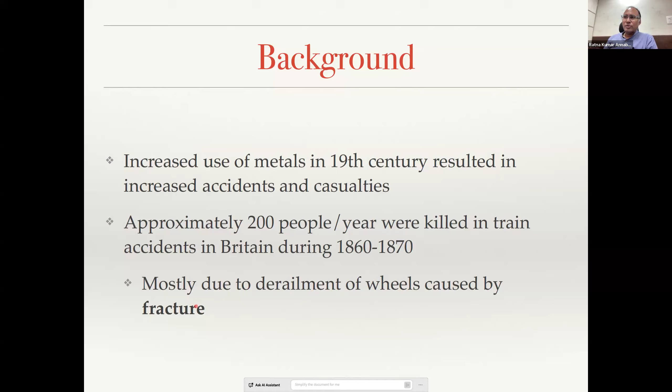Most of these accidents happened due to derailment of wheels, primarily caused by fracture. That means the wheel would have broken, for example, and that led to the failure or the accident.

If you look at news items on fracture failures in Britain: on 19th March 1830, at the Montrose Suspension Bridge, which is a suspension bridge having suspension wires, essentially steel metal cables, at one point of time there were 700 people standing on the bridge to watch boat rides, which were quite popular in Britain. The suspension bridge collapsed - one of the wires gave away, and then the bridge collapsed.

In 1887, a very disastrous year for railways in the UK, within a span of 3-4 months there were several accidents. On 20th April 1887, they saw the most serious train accident, which happened because of the breakage of the drawbar. There are other similar accidents, most of them associated with fracture failure of the components.

Another popular failure was observed in these Liberty ship accidents. During the Second World War, the Liberty ships were used in the Atlantic Ocean to fight Nazi forces.

In Britain, they were making these ships, but they didn't have enough capacity to make so many. So the USA said, okay, we will make them. Out of 2,500 Liberty ships made by the USA, there were at least 1,500 instances of brittle fracture. It's a huge number, and 3 of those ships literally broke into 2 pieces, like what you've seen in Titanic.

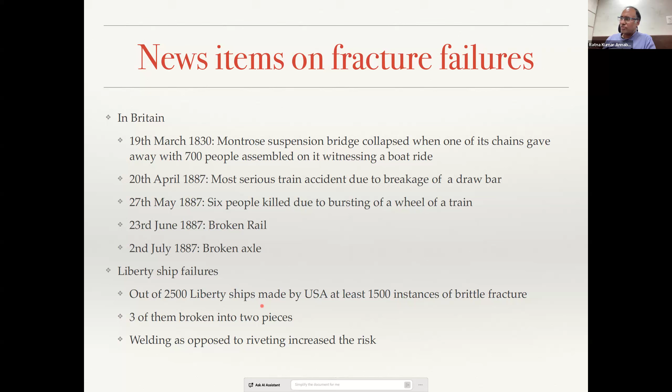So all these failures that happened are catastrophic failures primarily because of fracture, and all these involved the presence of cracks. For example, if you talk about commercial aircraft, you do a periodic inspection - every time the flight is taken, the moment it lands, there will be several inspections done.

These are called visual inspections. But from time to time, every 3 months or so, they will do a detailed non-destructive evaluation of the flights. Meaning, they will send ultrasonic waves and try to measure the length of a crack.

All these structures will have cracks in them. No matter what you do, you cannot produce a product without cracks. There will be cracks, but are these cracks of such a size that one needs to be worried about? That is what these periodic inspections will tell you. If they are not critical, they will let the flight fly. Otherwise, they will have to do some intervention.

Similarly, cracks or crack-like defects in ship structures, bridges, pressure vessels - everywhere you will have cracks. And hence also in nuclear reactors, cracks or crack-like defects are a serious concern. So one needs to keep in mind how to design components when there is a crack present in the material.

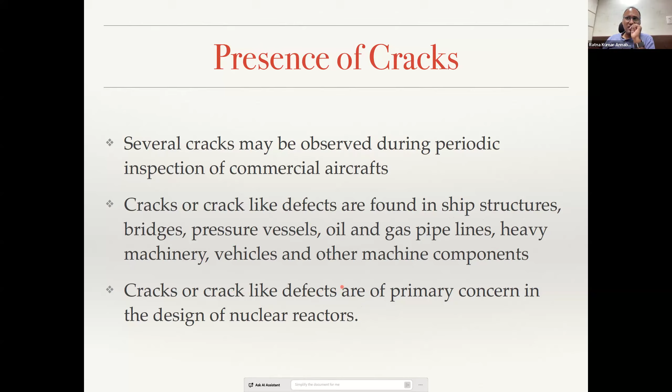So in the previous classes, we talked about the stress concentration factor. When there is a geometric constriction, you have stress concentration, because of which locally there will be very high stress generated, although far away your applied stress is less. That is designated by the theoretical stress concentration factor.

What does it indicate? It indicates the average load required for the onset of plastic deformation. That means if you apply 100 MPa, you may have a region where the stress concentration is 4, and hence locally the material is experiencing 400 MPa, which is much above the yield strength of the material. So one needs to be very careful about it.

This KT, the theoretical stress concentration factor, is limited to structures with known dimensions. As we saw in the last class, to compute KT you have to know the dimensions. Depending on the dimensions, the KT may change.

We know that if you take the case of an elliptic hole, when you make the minor axis dimension d tend to 0, then the KT tends to infinity. That means KT approaches infinity when there is a crack or flaw or inclusion where the root radius tends to 0. So if you have an elliptic crack or a slit in a material, the d is essentially 0.

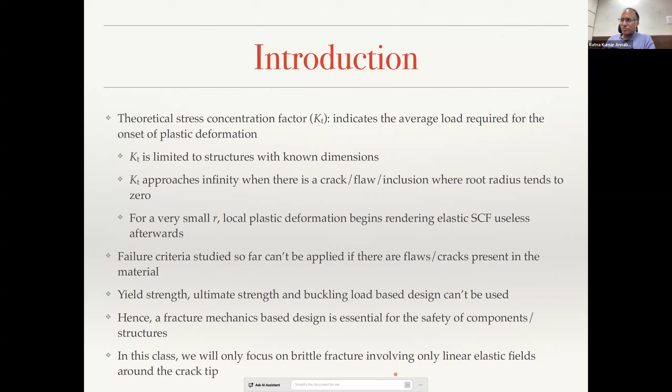So as I told you, if you look at an elliptic or ellipsoidal crack, and you are applying a far field stress, the stress concentration factor, the sigma at any position, depends on the far field stress S times 1 plus 2 root C by rho. The sigma we are talking about is at the crack tip, at this position.

Now rho is the radius of the crack tip. What is the radius of the crack tip? If you would plot the curvature of the crack tip, and plot the stress concentration factor, that is sigma by S on the y-axis, and x by rho, the position, on the x-axis, you ask: at a given position, what is the stress? Far away, it should be equal to sigma y.

But near the crack tip it is going to be 7 times the stress concentration factor, depending on the value of C by d being 3 — 2 times 3 is 6, and then 6 plus 1 is 7. So the stress concentration factor is 7. That means, although in the far field you have applied only 100 MPa, here you will see 700 MPa. And that could be much beyond the ultimate strength of the material, hence you need to be concerned.

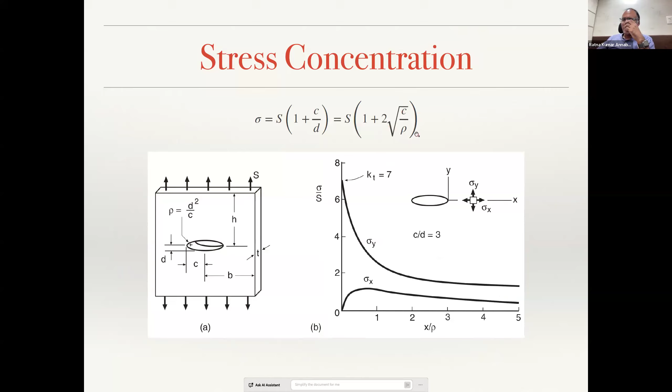Similarly, if you have a purely brittle material, you will have several micro cracks ahead of the crack tip, and those get activated when you apply the load. So there are different ways that stress concentration can develop, but unlike the theoretical stress concentration factor that we estimated to be infinite, in reality it will never be infinite because of these various constraints that we encounter in real materials.

Okay, now let us look at this particular scenario. On the left hand side in this figure, on the y-axis you are plotting crack size, on the x-axis as a function of time. Let us say you have a structure whose crack length is some number initially. As the structure is subjected to loading, as a function of time, the crack length is increasing.

So when the crack length is A0 here, then the structure will have some strength. That is what we call the design strength of the material, assuming that there is no crack. But as the crack increases its length, the material's ability to resist the load decreases. The residual strength decreases, right?

And let us say you have designed a component whose expected highest service load is this, and you have designed the component here. Until from here to here, failure will not occur because the expected highest service load is here. Once the crack length increases beyond, you will have further reduction in strength, and that is when the failure may occur.

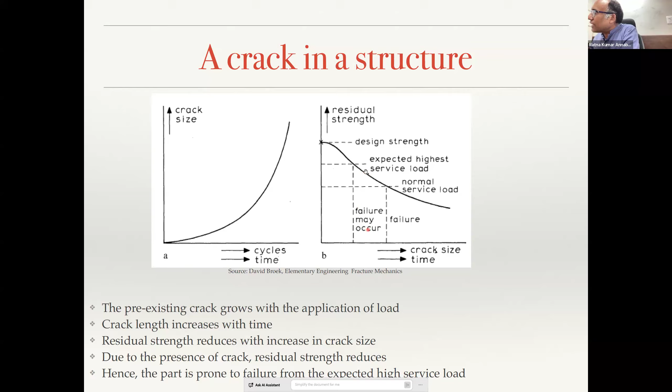Okay, now the second question is, let us say this is my service load, meaning this is the load that the component is going to be exposed to. Another question I can ask is, what is the maximum size of crack that I can tolerate? If my crack size is this, then at the service load the residual strength is this. If I am confident that my component is only going to operate at the service load, and I am not going to increase it, then depending upon the factor of safety, I can possibly allow this much crack size. So that is the question: can I know what that crack size is that I can allow?

And the third question is, now let us say I know what the critical crack size is. So I should ensure that I know my service load, and I should ensure that my crack size does not go beyond this value. Now, when I commissioned the component, I did the NDT and found that the maximum crack size is some number, much smaller than the critical crack size. Now, when will the structure fail? When this initial crack size, found to be much smaller, grows to the critical crack size. That is when the structure will give way. Now the question is, how long does it take for this initial small crack to grow to critical crack size? That's important information for us as engineers to decide whether we can keep the component in service.

And then, for example, if I have designed a component — say I have designed an automobile axle — and the service life of that automobile axle is 20 years, that is the maximum service life I have given; I have not given warranty beyond 20 years. Now the question is, what is the maximum size of crack that can be permitted when the structure starts its service life? Meaning, if I have to give a life of 20 years, at the beginning of service what is the maximum size of crack that I can have? If I have a crack larger than that, I cannot give 20 years of service time, because within 20 years it might reach critical crack size.

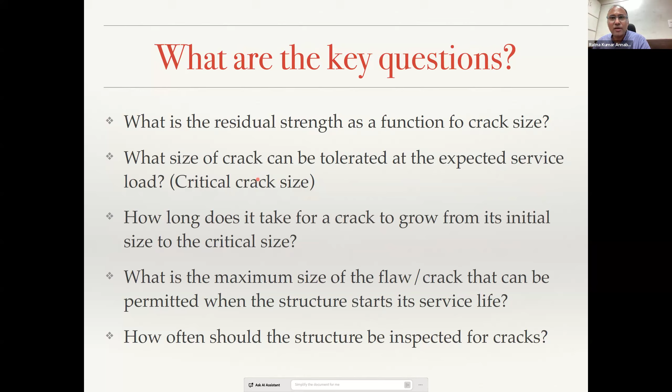So these are questions that we have, and in order to ensure safe working of a component that you are deploying, the answers to these questions are extremely important. So who will answer these questions? The answers to these questions, or some of them, can be given by fracture mechanics. So if you adopt a fracture mechanics approach, you can answer some of these questions. For the other questions which cannot be fully answered by fracture mechanics, fracture mechanics can still show a direction in which you can go to find the answer. And that is the reason why we need to study fracture mechanics. Any questions until now?

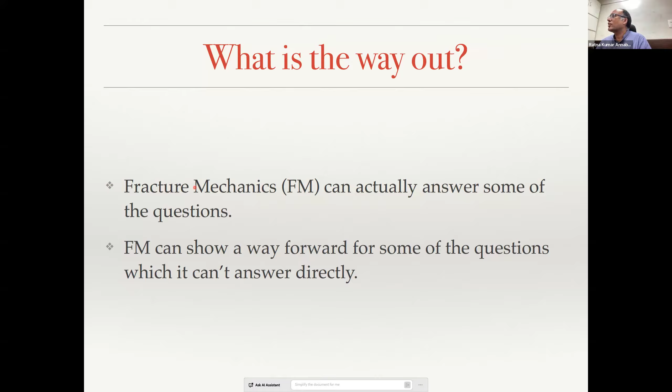Okay, if there are no further questions, now what do we mean by fracture mechanics? At what scale do I need to study fracture? There are various scales at which we can understand it.

One, you can start from atomic scale, meaning you can talk about interatomic bond failure. That is also fracture mechanics, but it's interatomic bond breakage. When do two atoms get separated? Suppose if you are applying only a normal load, how do they get separated? If you apply an oblique load, how do they get separated? Is it the same way?

And then you have an intermediate level where you talk about crystals and dislocations, individual atoms, individual grains. That's a much higher length scale. So how a crack will propagate through the grains.

This happens at a few micrometers to millimeter scale, and plasticity happens at a millimeter scale, because you homogenize these individual grains and only talk about macroscopic plastic deformation. There you talk about how the crack grows.

And then you talk about laboratory scale testing to measure the fracture toughness of the material. But all these should be used at the application level. If you are designing an aircraft, you need to ensure it will not break after so many flights. So fracture mechanics cuts across all these length scales, and a successful design based on fracture mechanics requires knowledge across these domains.

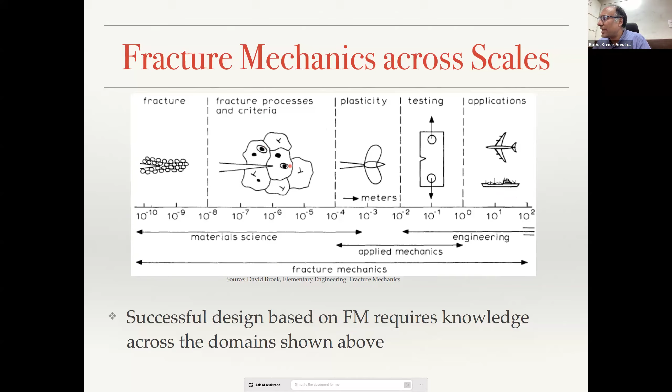That is why we have studied crystal structure and deformation mechanisms, and what we mean by plastic deformation, and macroscopically how the stress strain curve looks. All these we have had a gentle introduction to. So having this knowledge will enable us to understand fracture mechanics based design a little better.

Okay, so now whenever we talk about fracture, we talk about modes of fracture. There are 3 modes of fracture. This is what we call opening mode.

So if you have a specimen like this, and this is your crack, and this is your crack face, and if your load is applied normal to the crack face, and it opens the crack, this is called mode 1 crack, opening mode. And if your applied load is parallel to the crack face, in the plane of the crack face, then it is called mode 2.

This is what we call sliding mode. And this is mode 3, which is called tearing mode, wherein the load is not normal to the crack face, but is in the out-of-plane direction to the crack surface. That is what we call tearing mode.

So any failure in a component can happen only in mode 1, mode 2, or mode 3, or a combination of mode 1, mode 2, mode 3, depending upon the type of loading.

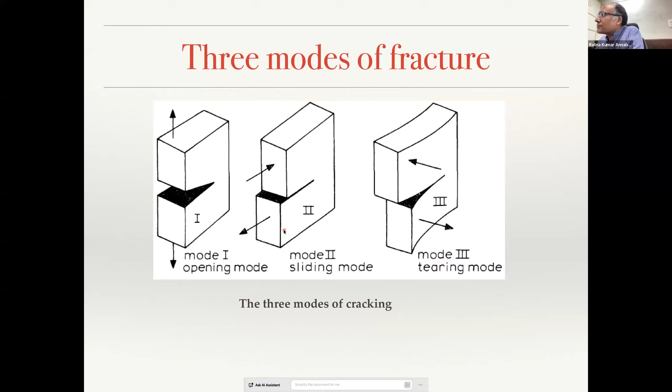So now let us do a very interesting experiment in order to understand fracture mechanics. This is what we call Griffith's experiment. Griffith is called the father of fracture mechanics.

So, he did an experiment on a brittle material. More precisely speaking, he did an experiment on a glass plate. He has a brittle material which is unstretched in this configuration, and then he took that and stretched the material. That means he deformed the material and then fixed it.

So that means you take a material and deform it and then fix the ends. That is the meaning of that. After deforming, you are not letting it move anymore. The ends cannot move now.

And then what he did was, he took a knife and created a crack at the center, like that. What happens then? Then you create a crack at the center, what happens? It will start to grow actually. Not necessarily all the time.

We will do this experiment in the class now, and then you will realize what would happen. There will be some stress concentration. You have created the crack. Now let us try to understand what happens when you load the system. There is some strain energy that is stored in the material. Do you agree?

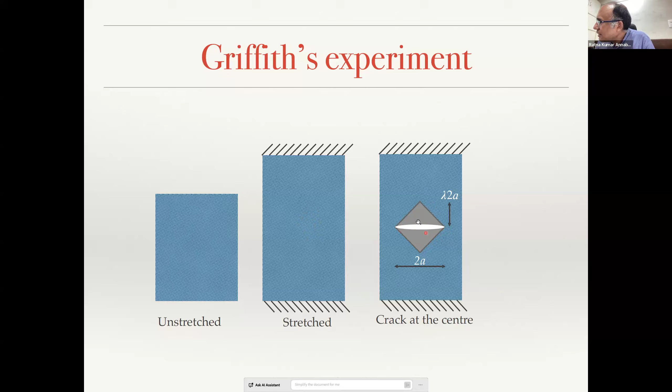Isn't it that energy should be consumed to create a new surface? That consumption is coming from the stored energy. The moment you create a crack, you have created a slit. That slit is formed by consuming the strain energy. The strain energy gets released. The stored energy gets released, and that is forming these 2 new surfaces.

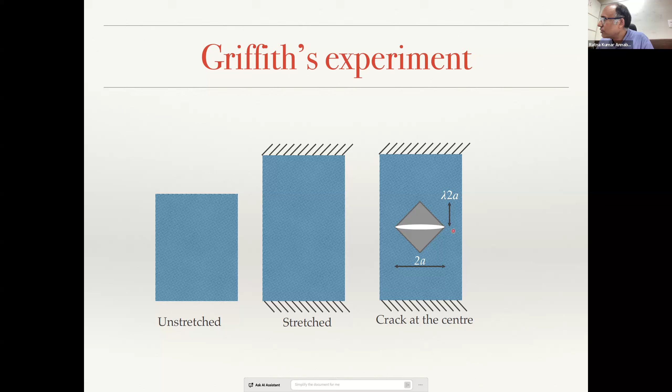So this is Alan Arnold Griffith. Now, where will the energy come from? The energy that is getting released to create these 2 new surfaces will come from the entire plate. But for simplicity, for the sake of argument, we assume the energy is coming from these 2 triangles, whose base is 2a and height is lambda times 2a.

So this is the experiment. Take a sheet of paper, apply a force, stretch it, and hold the grips. What is the meaning of that? You apply load. So if I am taking this fellow, this is the paper, and I am applying some load. I have applied certain load, but it is not flat enough, so I ensure that it is flat enough. After applying the load, hold it.

What do you mean by holding it? You should not be moving the grips. That means these ends cannot move anymore. It should stay at that scenario.

Now use a knife to cut a slit. So while holding, you ask your friend or someone nearby to cut a slit in the center. And the length of the crack is to be ensured to be small. If you cut a small crack, nothing will happen.

Can some of you sitting in the classroom, maybe 2 people, try this experiment? Take a paper, stretch it a little, hold it, and ask someone else to make a slit in the center. Nothing will happen if the slit length is smaller. But as you continue to increase the length of the slit, at a certain length, without further help from the knife, the crack will grow on its own. The crack extends - you can try this experiment.

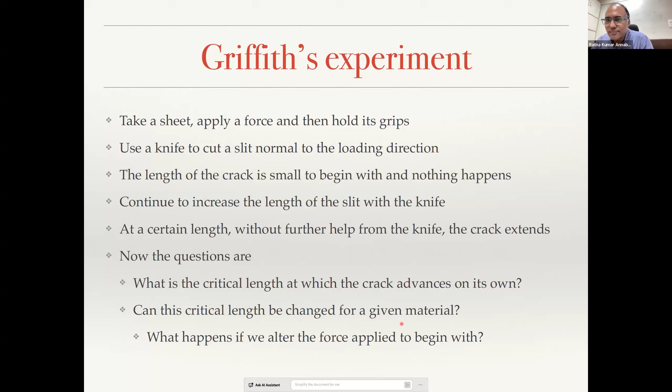Now the questions are the following: What is the critical crack length at which the crack advances on its own without any further help? And can I change this critical crack length for a given material? Also, if you had initially stretched it to x displacement and held it, versus stretching it to 2x displacement and held it, is it going to influence the critical crack length? So these are the questions we asked.

So now we need to understand surface energy, as we discussed. Like surface tension in liquids, solids possess something called surface energy. In a solid, all the atoms in the bulk, the center of the material, are surrounded by a similar environment. Whereas on the surface, only the atoms below the top layer offer bond strength and bond resistance to the top layer, but there is nothing above the top layer. So the atoms at the free surface and a few layers below have only bonding force from beneath and very little from above. As a result, the surface layers experience strain and deform, and this deformation of the surface atoms is what we call surface energy.

And what Griffith said was, the crack in a material advances when the released energy exceeds the energy required to create 2 new surfaces. So when you are creating a slit, some amount of energy is released. When that released energy exceeds the energy required to create 2 new surfaces, that is when the crack propagates. Otherwise, the crack will not advance. Is that clear?

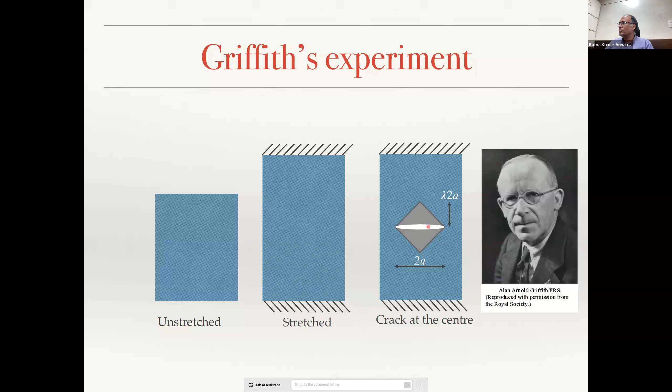That's basically the incremental energy released we're talking about. So the total energy release, suppose you're cutting a crack of length 2a, a slit of length 2a, the total energy release will be strain energy density times volume, with out-of-plane thickness unity, then the total volume of the triangles times sigma square by 2E. Sigma square by 2E is your strain energy. There are 2 triangles, half base into height into out-of-plane thickness b, assuming rectangular cross section. Sigma square by 2E. So this gives you 2 lambda a square b sigma square by e.

Let us assume, without loss of generality, lambda to be pi by 2 — typically experiments have shown lambda is close to pi by 2. So your total energy release is pi a square b sigma square by e. That is the total energy released.

Now if gamma is the surface energy per unit area of one surface, then 2 times the length of the surface is 2a, out-of-plane width is b. So this area times gamma is the surface energy. This is the energy required for creation of one surface, but when you create a slit, you create 2 surfaces. So the surface energy required for creation of the surface is 4ab gamma, where gamma is the surface energy.

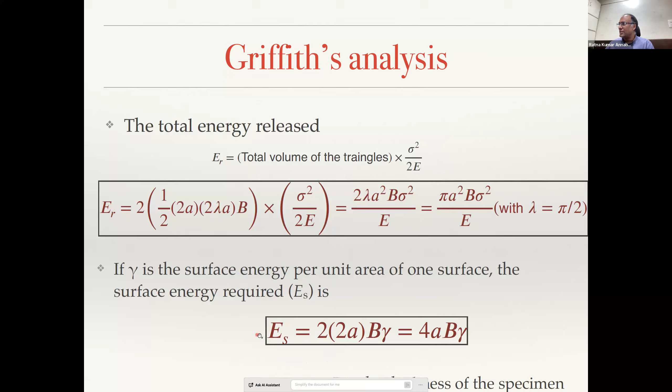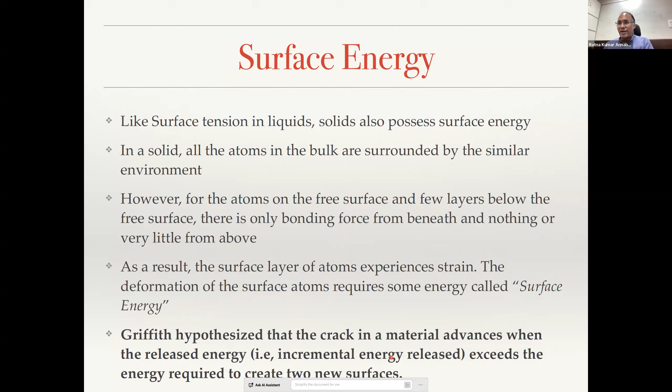E is the elastic modulus, gamma is surface energy, sigma is the applied load — sigma is stress, meaning the applied uniaxial stress. So your critical crack length depends on surface energy and elastic modulus, which are material properties, but sigma is the applied load. So if you apply a larger load, the critical crack length becomes smaller — at a small crack length it will catastrophically propagate.

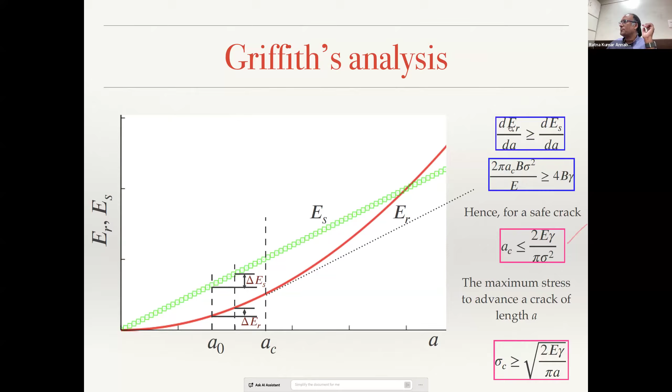So now with an advancing crack, we know that the strain energy in the component can either decrease or increase. We will see how it can increase. However, the stiffness of the component decreases.

Depending upon the boundary condition, the point of application of load may move or may not move. That means if you have a fixed boundary, then the boundaries will not move.

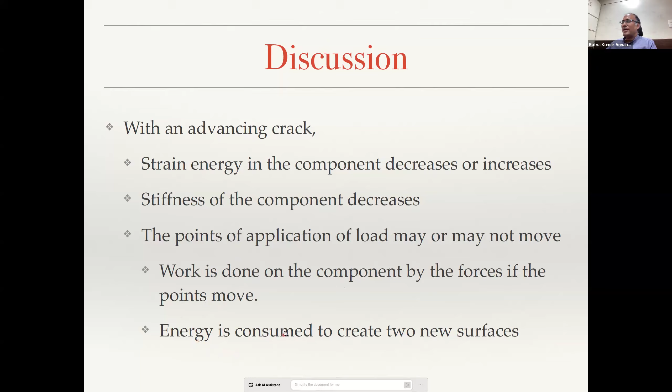Now, work is done on the component by the forces if the points move. Otherwise, energy is consumed, and that energy is consumed to create two new surfaces. This is something we know.

Now we will calculate something called energy release rate. That means what is the energy released per unit crack length? That is dER by dA, which we have calculated. This is what we call energy release rate, given the symbol G, in honor of Griffith. It tells you how much energy is released when a crack advances, per unit increase in crack area.

Now let us consider an incremental increase in the crack area to be delta A. That means initially you have some crack, and then you have extended the crack by some amount. Because of that, the crack area has increased by delta A.

And there is an incremental external work done to create this crack extension. So in order to create the crack extension, you have to do some external work—you need to apply a load or do some work. That incremental work is delta Wext. As a result, the change in strain energy of the body is delta U. If it is positive, it is called increasing, and if negative, it is decreasing.

So the available energy, which is energy release rate times delta A, provides the energy balance. You can say that G times delta A is equal to external work—this is energy per unit area times area. So energy is equal to external work minus the increase in internal energy, or change in internal energy.

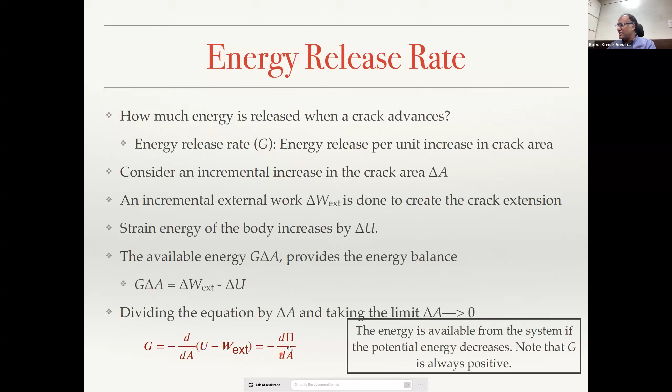Now let us assume a plate of uniform thickness B. Then G can be written as minus 1 by B, d pi by dA. Otherwise, this dA is written as B times da, where da is the small crack length.

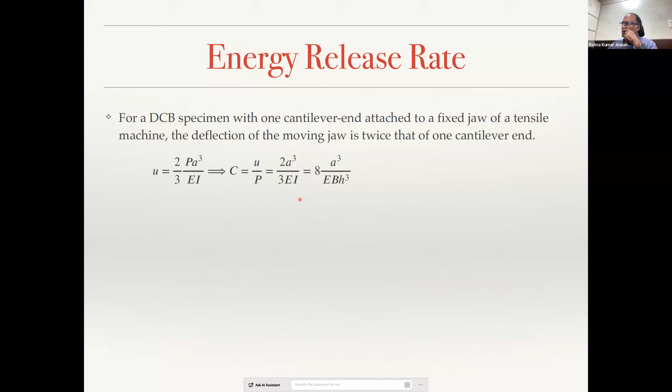Now let us take the example of a DCB specimen. DCB specimen is a double cantilever beam specimen. Do you know how it looks like? How many of you know how the double cantilever beam specimen looks like?

You have to say yes or no. No sir, no sir, no sir. Sir, there was a slip in between actually. Why is it taking so long to answer? Okay, let me move to my slide.

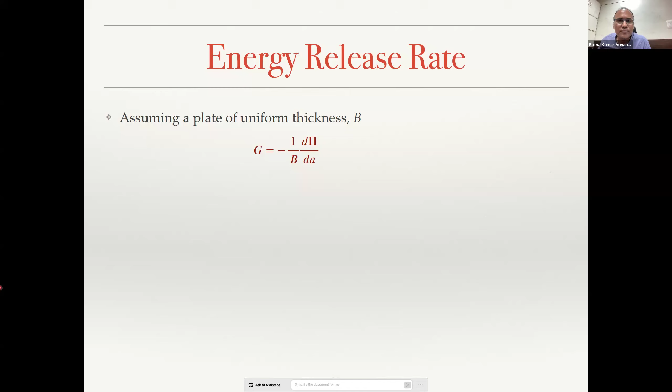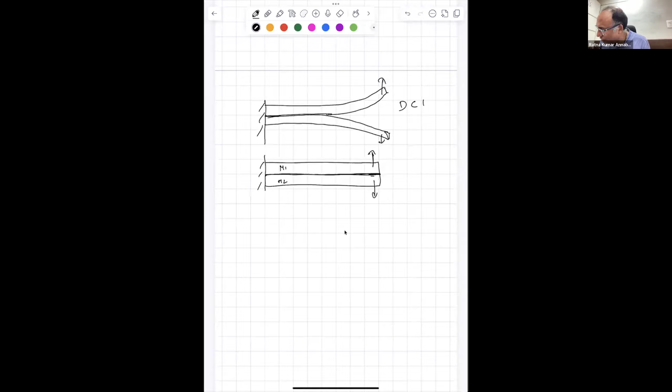A double cantilever beam specimen looks something like this. So initially you have—this is material 1 and material 2, or it is the same material 1, but with an interface. This is the interface. Now if you apply a load, let us say there is a crack here, then if you apply the load, the crack gets opened, and that is how this deforms. This is what we call a double cantilever beam, because this is one cantilever, this is another cantilever.

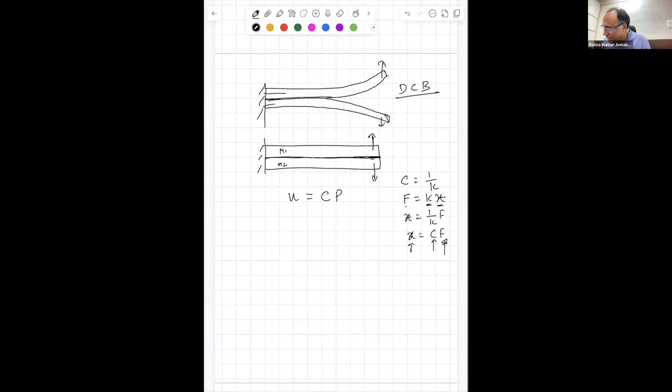Now let us say in this double cantilever beam specimen, the displacement U is written as compliance times load. What is compliance? Opposite of stiffness, right? Compliance is 1 by stiffness K. Normally, F is equal to K x, force is equal to stiffness times displacement. So x is equal to 1 by K times F, that is C times F. So displacement is equal to compliance times force applied. So here this is displacement, this is compliance, and this is force.

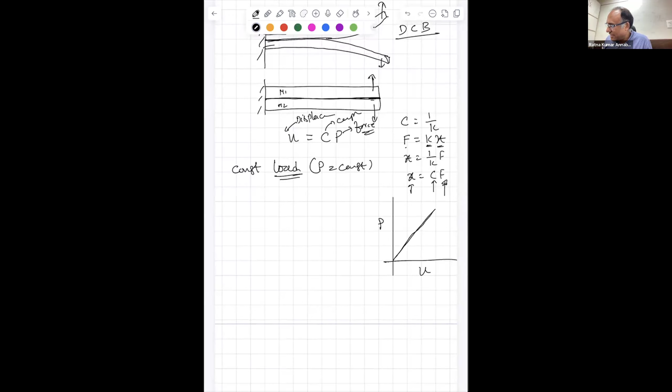Now let us take a scenario where we have a constant load applied, that means P is equal to constant. This is a linear elastic material, so P versus displacement will give you a straight line. So the strain energy can be written as half P times U. Can I do that? Strain energy is the area under this curve. Yes.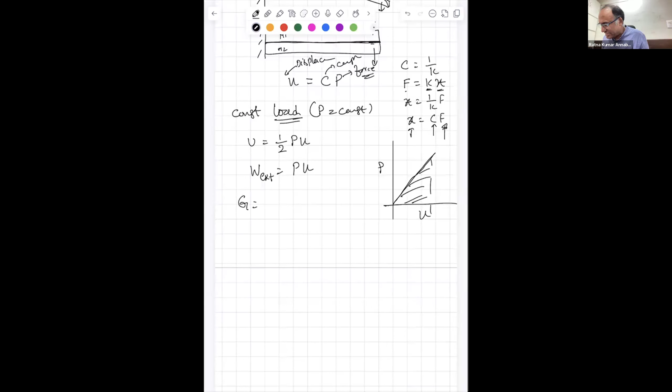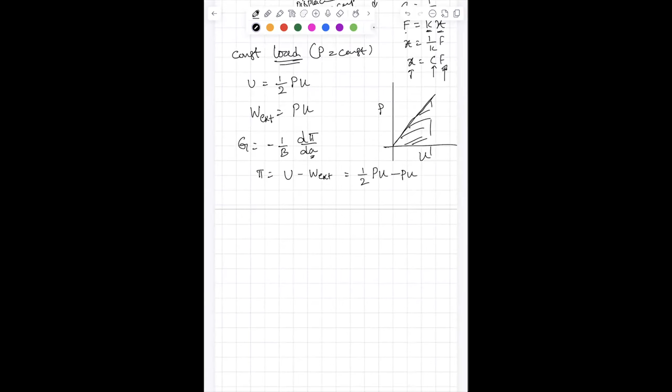W external work: if I am applying a load P, because of that P there is a displacement U. Force times displacement is your work done. Now the strain energy release rate is given as minus 1 by B d pi by dA, where A is the crack length. What is potential energy? U minus W external. So that is half Pu minus Pu. So that means your potential energy is minus 1 by 2 Pu. Do you agree?

Yes sir. So now G is equal to minus 1 by B d pi by dA, that is equal to 1 by B d by dA of half Pu, 2B. We are applying a constant load, right? P is constant means P can be taken out. Then that means P by 2B du by dA.

Correct? But we have written that U is equal to Cp. That implies I can write U is equal to Cp, that is equal to P by 2B d by dA of Cp. Again, we know this is constant, so I can take this guy out. So this will become P square by 2B dC by dA. That is your energy release rate, where C is your compliance of the material.

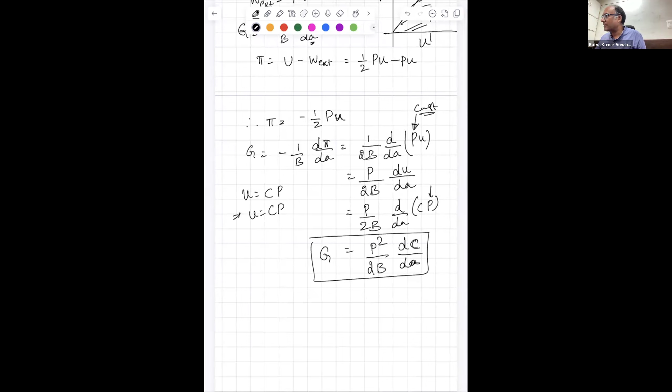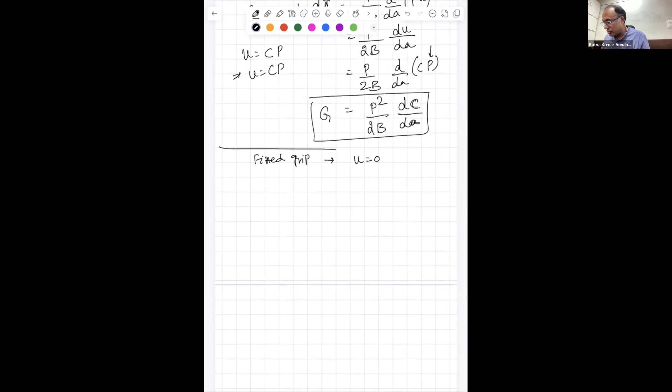Now this is when you have a fixed load, the load is fixed and the displacement is changing. As opposed to that, if you have a fixed grip, that means displacement is 0, but P is changing, or U is constant, not 0, and P is changing. Then the potential energy is what? U is not changing, U is constant, displacement is constant. So dP then by dA.

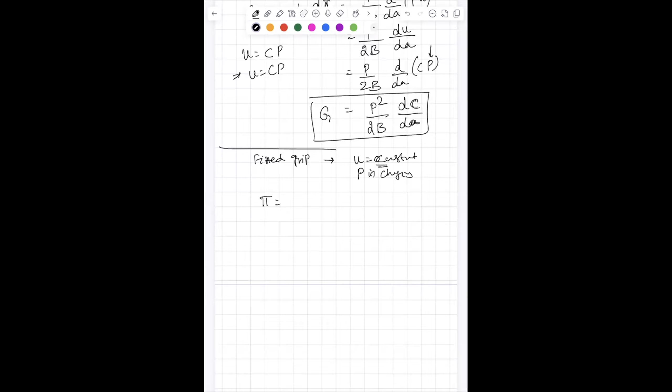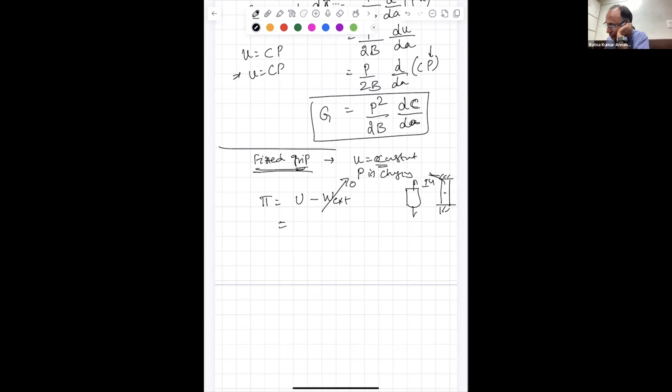U minus W external. If the grip is not moving, what will be the work done? Zero, no? If the grip is not moving, this is fixed grip. The body is deformed and has made a displacement of U, and at that instance it is fixed. That means this guy is not moving, so there is no work done. Even if you create a slit, the work done will be 0, and it will be 1/2 Pu. That is your potential energy.

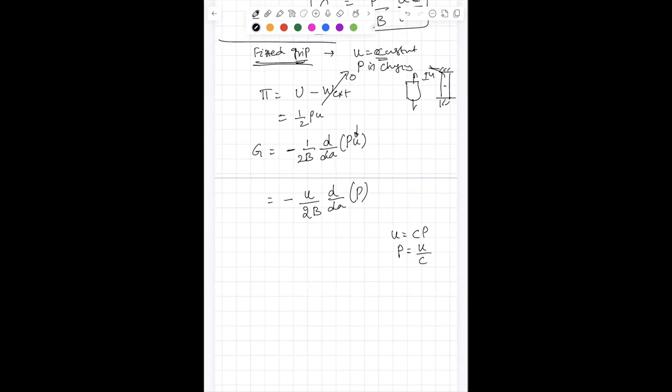So G is equal to minus 1 by B, 1 by 2B d by dA of Pu. And what we know, U is constant, so minus U can be taken out, 2B d by dA of P. But what do you know? U is equal to Cp. So P can be written as U by C, isn't it? Yes or no? Yes sir.

So that is equal to minus U by 2B d by dA of U by C. And U is constant, but the compliance of the material or the stiffness of the material changes as a function of crack length. So I can take U outside: minus U square by 2B d by dA of 1 by C, or dC by dA of 1 by C. That is nothing but minus U square by 2B, minus 1 by C square into dC by dA. Isn't it? Chain rule of differentiation. All of you agree with that or not?

Yes, yes. And now I know U is equal to Cp, so in this U I can plug in, minus into minus became plus. U is Cp, that is C square P square by 2B times 1 by C square dC by dA. C square gets cancelled. That is P square by 2B.

Whether you are applying fixed grip or fixed load, your G is P square by 2B into dC by dA.

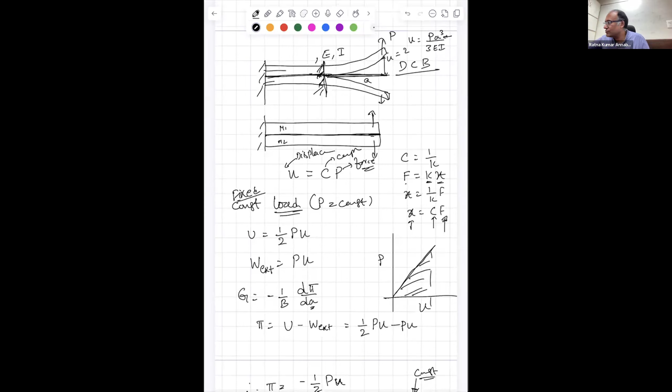It is like this. You carefully look at the experiment that I am showing you here. I have created a crack of certain length. Can you see my screen?

Yes, sir. So now if I am applying a load like that, right? Now everywhere here, in this part, the material is intact. So there is no deformation, there is no displacement that is happening. Now if I am pulling, it is behaving as if this end is the fixed end, isn't it? This is my fixed end, and then the cantilever load I can apply, and the length of the beam is like my crack length. This is my crack length.

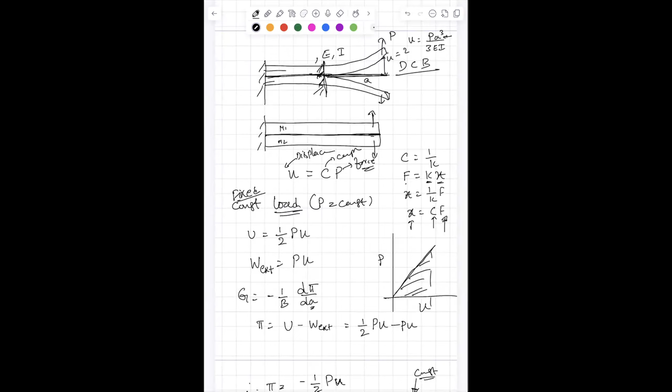That is my crack length. You can see that? So, yes, sir. So I can write my U is equal to, for a double cantilever beam, on the top PA cube by 3EI, but at the bottom also it is same, right?

So the total displacement will be 2PA cube by 3EI. And what is compliance? Compliance is equal to U by P, that is equal to 2PA cube by 3EI times 1 by P. P-P gets cancelled, right? So what you have?

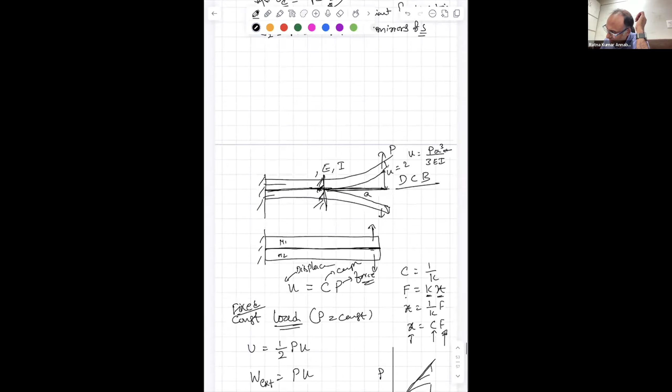2A cube by 3EI. Now you have a specimen with out of plane thickness B, and let us say the cantilever has this to be H, right? Then if that is H, the moment of inertia will be BH cube by 12. Do you agree?

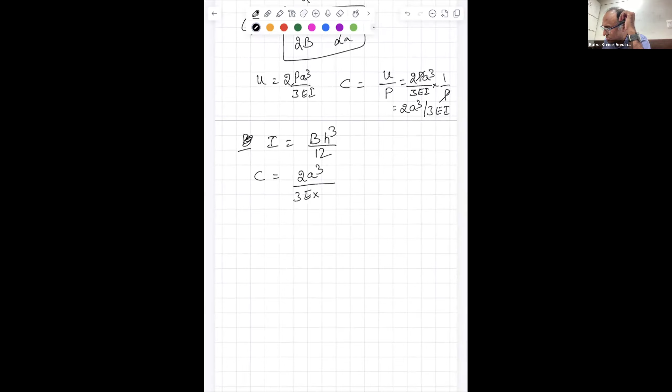So your compliance will be 2A cube by 3E. I is B times H cube by 12. So it will go there, and this is 4, that is 8A cube by EBH cube. That is your compliance. So what is your dC by dA then? dC by dA is equal to 8 into 3A square by EBH cube. That is 24A square by EBH cube.

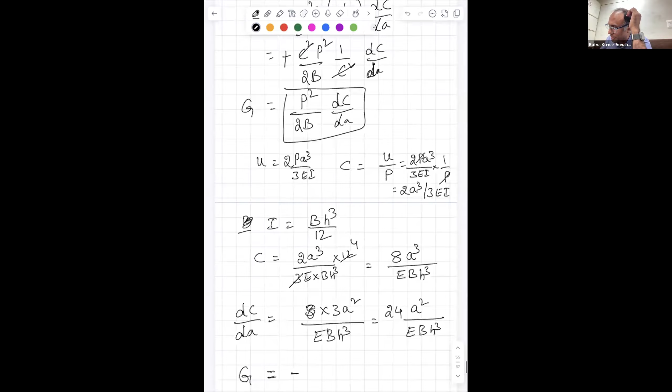So the energy release rate for the cantilever is what is that we have computed? Energy release P square by 2B into dC by dA, that is P square by 2B into 24A square by EBH cube, that is nothing but 12P square A square by EB square H cube. That is your energy release rate.

And this is also called mode 1 energy release rate because the load is applied normal to the crack surface. Okay.

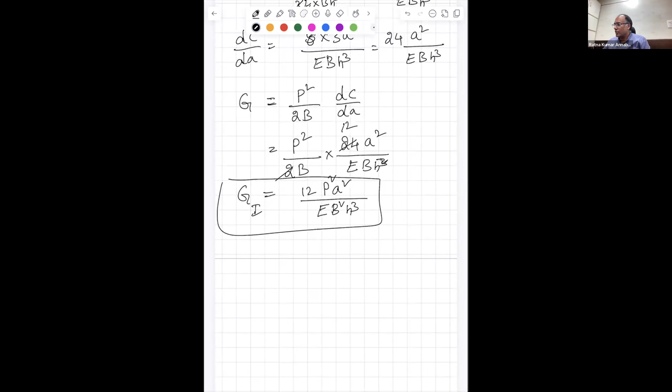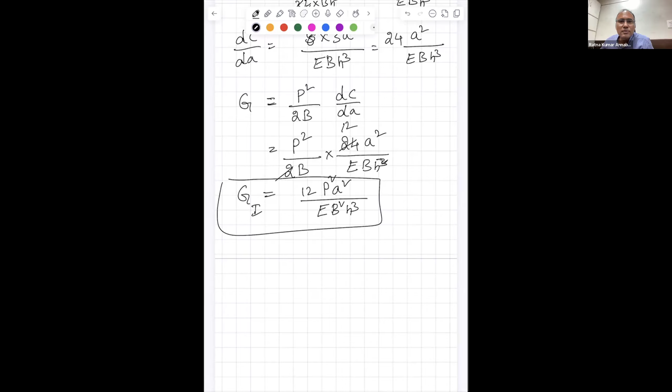Now, let me give you a problem and then let us see if you are able to compute this. Yeah. So this

That means the crack will propagate when this GI, the energy release rate, becomes equal to critical energy release rate. What he is saying is when I apply the load to be this much, that is when the crack propagates. That means whatever G that you are calculating, that is what is called critical energy release rate. Okay. Can you please do the calculation?